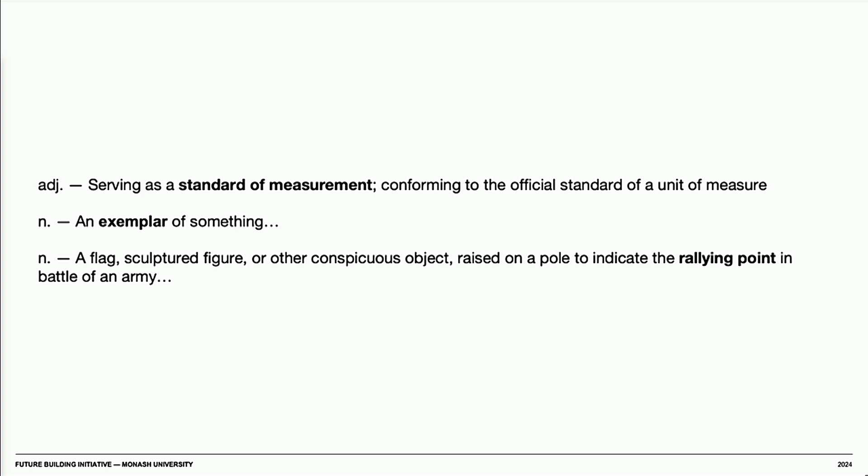More broadly, industrial standardization can be an enabler of innovation, and it can promote interoperability, compatibility, but in many ways that comes back to the people who activate the standards and the efforts towards standardization. I don't think we should miss that on the journey, rather than thinking of them necessarily as a technical tool.

There are, of course, challenges that others have touched on, but these are also enablers. I think we can often get fixated on the problem rather than seeing the opportunity. But these are global and local. As we've learned this week, many of the pressures here in California are replicated in various parts of Australia, and I think also when we've traveled to Europe, we've seen commonality.

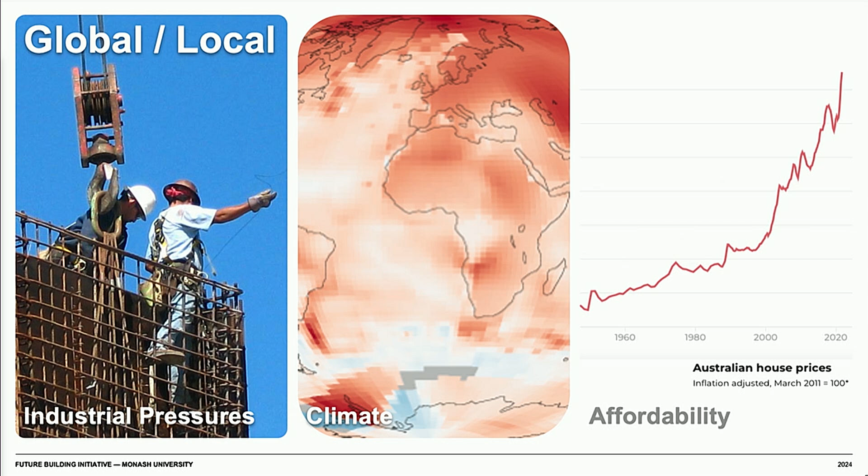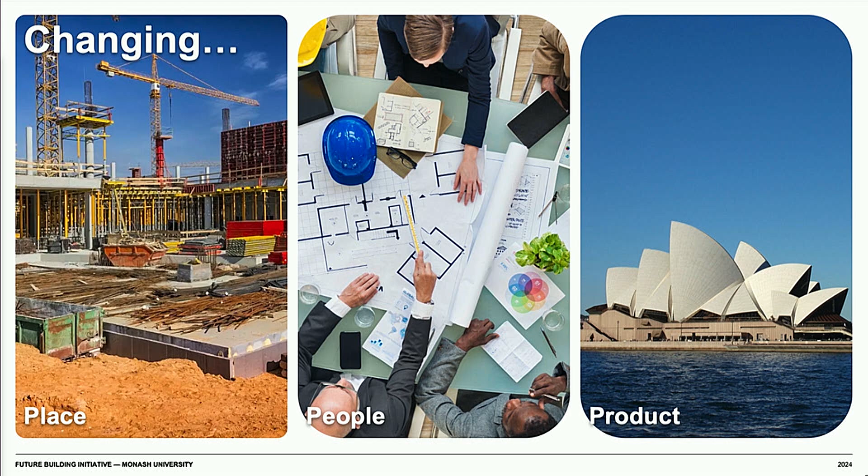Of course, there are issues that are specific to construction. Others have defined these - Koskela and Vrijhoef's three peculiarities to do with the site, stakeholders, and the product. And often we take a technical view of standards in the industry that really focus on coordinating the product, interfacing with site, but perhaps we miss the opportunity to work together in terms of coordinating people. Therefore, perhaps there's a softer view of standards that's required, and perhaps there's a role for design.

Of course, there's a history of designers in the built environment, and I'm not going to sugarcoat that. We are looking for a new way of working, socially, culturally, that is more productive. But I think when we look towards the future, there's a real opportunity to bridge the gap between research and market, and standards can play a role there, not just in terms of industry implementation. But of course, when we think about design in the built environment, there's a life cycle to contend with.

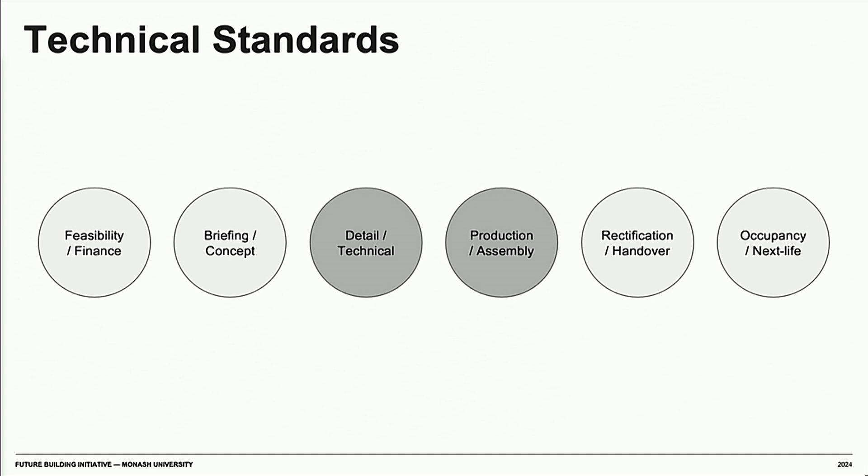Perhaps some of the technical view of standards really starts in the middle of the problem and looks to build out. If we can solve the interface of detailed design with assembly and production, then perhaps we've solved the problem.

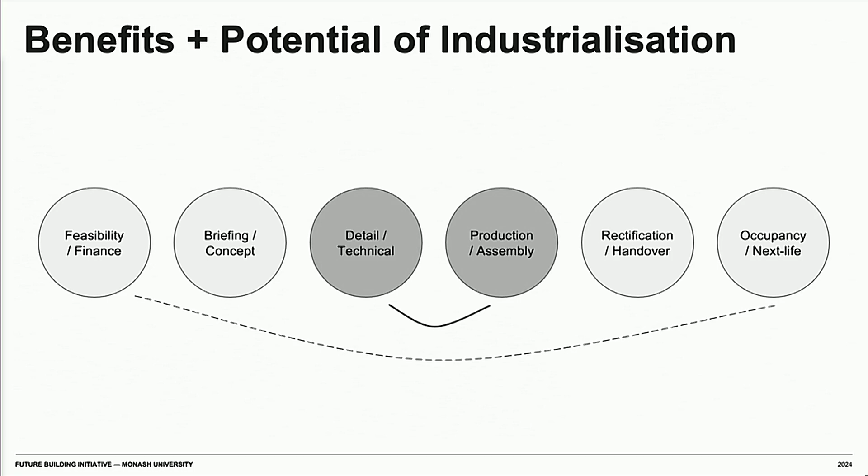But industrialization promises a new way of working, a broader way. And to my view, that really opens up many opportunities across this value chain, from early design ideation activities that contribute and help project feasibility, help projects get up, help them get financed, right the way through to occupancy and end of life, as others have touched on today.

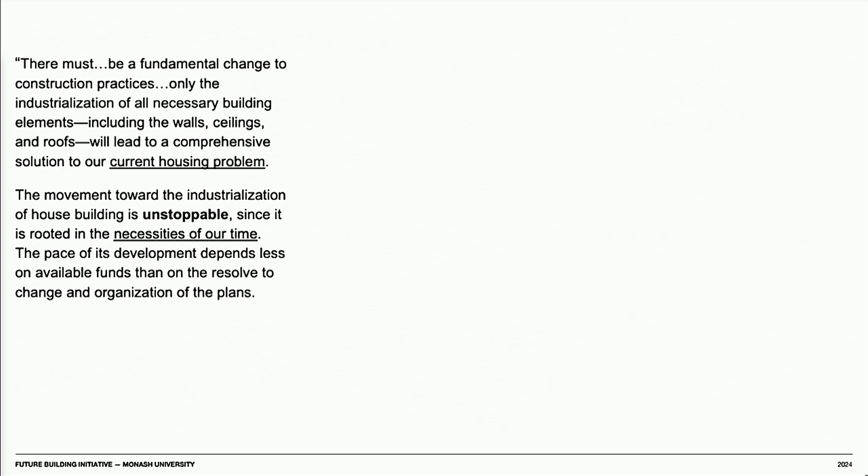But this certainly is not a new problem, and I dug out this quote. I'm sure others have presented this at various times. When we think about the housing problems today, we see industrialization as an unstoppable force, a necessity. But this is a quote from 98 years ago by architect Walter Gropius.

And so this really touches upon how architects have engaged with industrialization and change. As I said, it's a varied history. It is a long one.

If we go back to the late 19th century, there was a view that in the year 2000s, architects would be sitting on site, pushing buttons, seeing buildings get built.

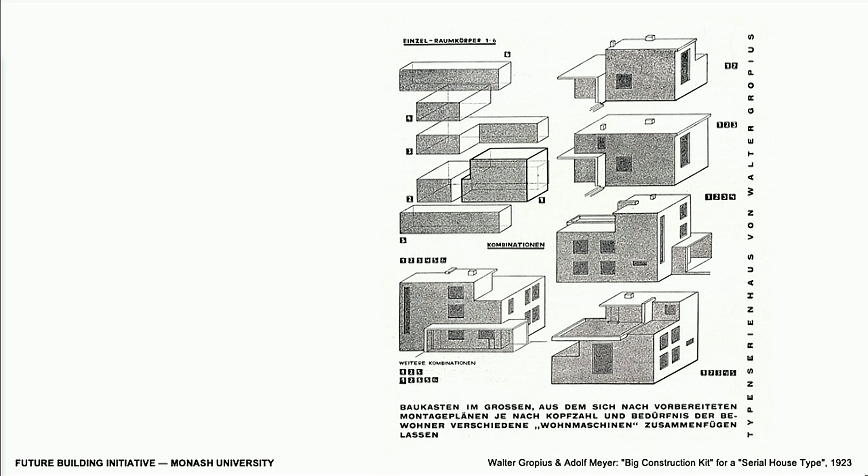And then during the 20th century, architects became interested in modes of production, mass manufacture, while others dug into the detail of building and looked at modular building systems down to the level of the concrete block, as Frank Lloyd Wright's Usonian homes did to a greater or lesser degree. And these modular building systems held a promise that perhaps there was a more efficient way of building.

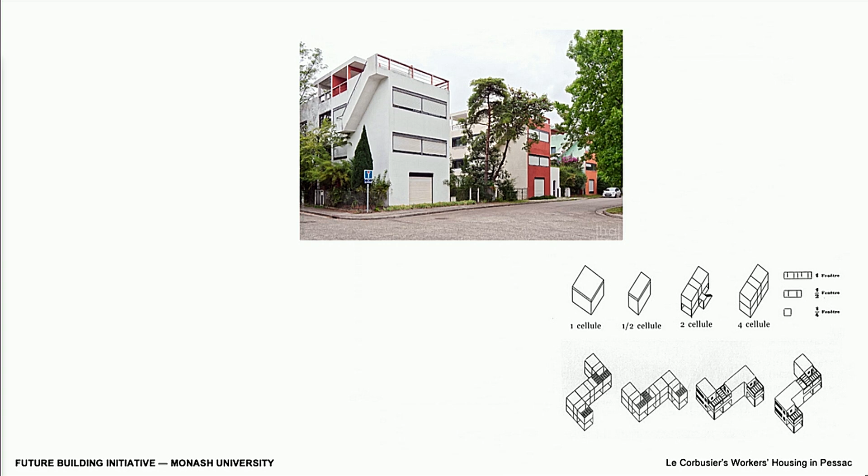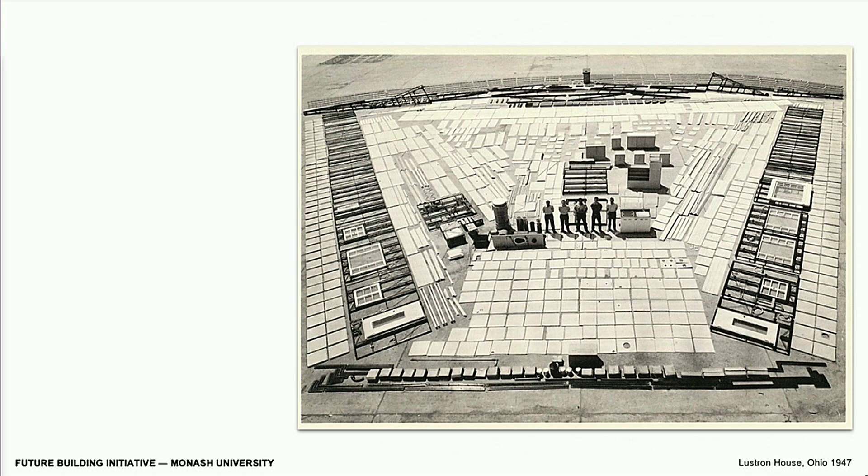And of course, there was a disruption of the Second World War, but that led to the creation of industrial infrastructure, and again, a promise of a new way of building that could leverage that investment, that infrastructure that had been put in place in response to the war effort.

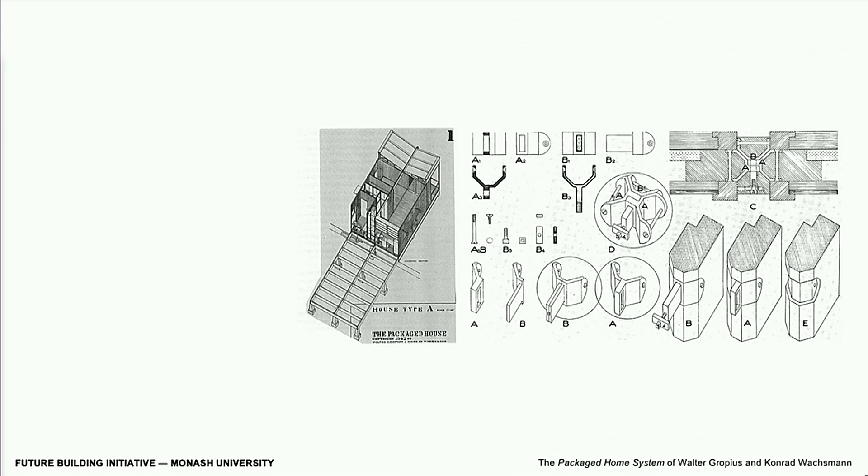But as we've seen, these initiatives obviously did not have the impact that were promised, but certainly created a number of ideas. Stopping at the midway point of the 20th century, I found this article from Fortune magazine, that reading it, you could replace the date from 1947 and put in 2024, and we might find ourselves saying exactly the same things.

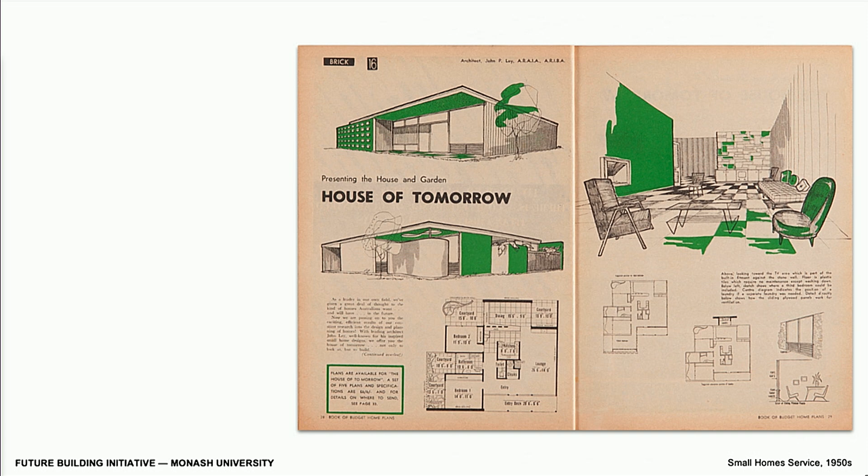We saw these homes as forms of suburban housing ideals, but that were effectively designed with an efficient intent, but also innovative ways of building and providing solutions for the greatest number of people for the least use of material, least use of labor.

But of course, as we moved through the 20th century, the number of industrialization efforts that were perhaps not quite as successful as were planned. And again, architects perhaps bore the brunt of many of the criticisms of these mass housing solutions, despite responding to a time of crisis of housing shortage, the need to rehome people after the Second World War.

And these are well documented and spoken by others as a failure of industrialization in many ways, and the legacy of that modernist period.

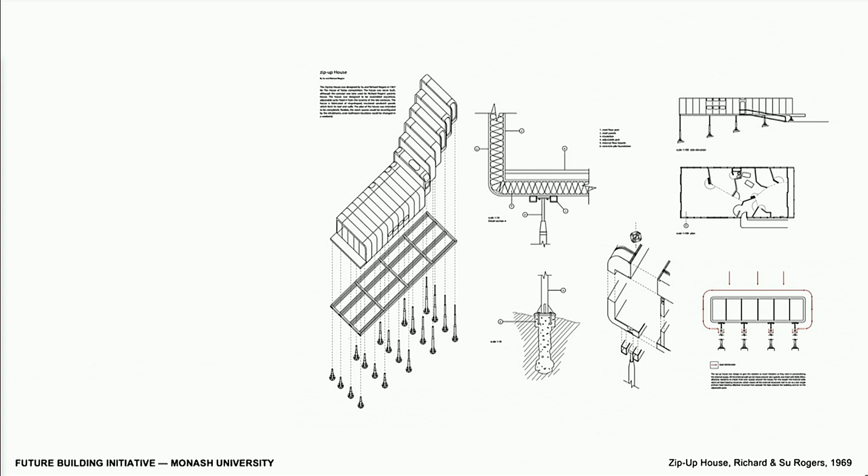And so later in the 20th century, architects drifted from that core intent of looking to industrialization as a means of delivering housing for many people, and really focused on the building systems, the logics, the ways of seeing design, or systems building as a tool of conceptual investigation rather than industrial implementation.

So really this is a story of a long pursuit of change, and it certainly doesn't stop in the 1990s, because since then there have been a number of reviews that tell us the same problem again and again, but perhaps architects have been less invested in these reviews, perhaps having been scared off by the mid-20th century failures.

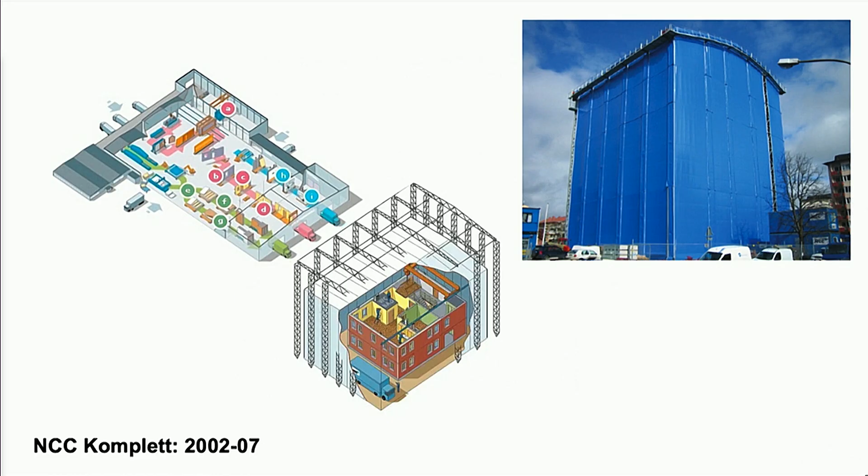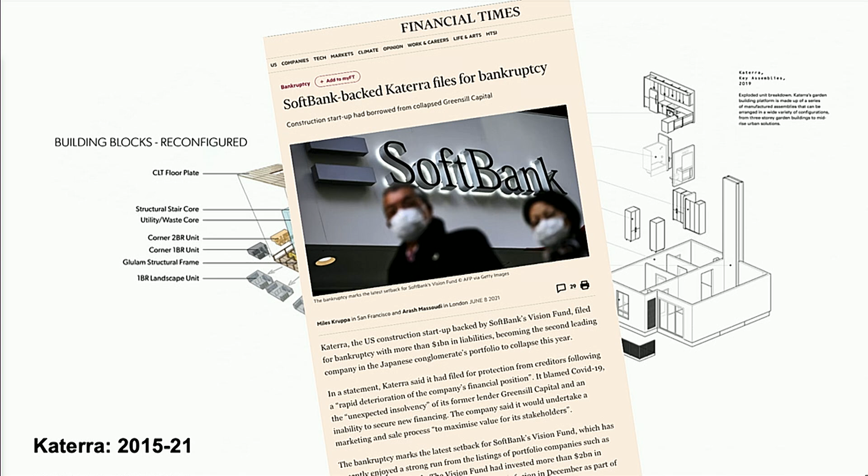Over the last 20 years, there have been a number of failures. Others have touched upon these, and I don't want to dwell on them and be a naysayer or a doom monger. But others have also asked questions about the perils of growth. And most recently, these failures in the UK have prompted the parliamentary inquiry into MMC.

We've done some work just looking at the last 5 years as a snapshot, and as a minimum, we calculated that there was between 3.6 and 4 billion US dollars written off in these failures. Of course, a substantial chunk of that is Katerra. However, it's not without regards to the number of other very similar efforts that have failed.

So looking for a pathway forwards, what do we see? What do we think that is and could be? Well, as a research group, we see that opportunity being design as a way to navigate the puzzle.

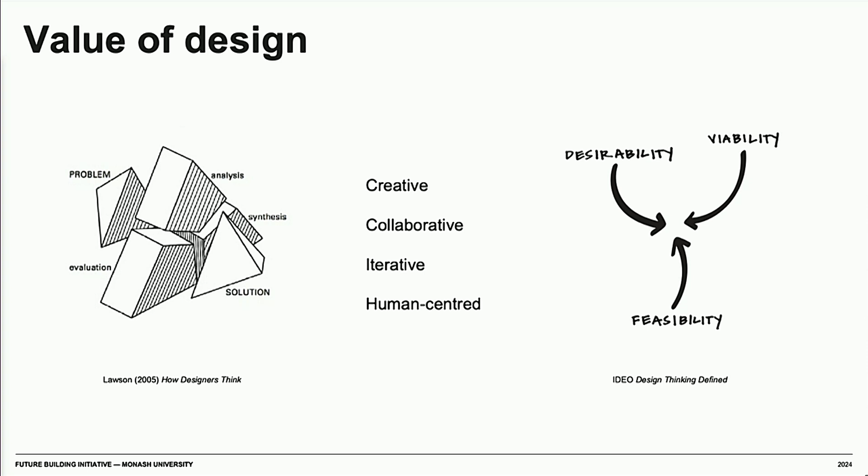There are a number of definitions of design out there. I'm not going to try and provide a concrete definition, but certainly there's a problem, there's a solution, there's analysis, evaluation, but also synthesis, and I really want to dwell on that. We're also looking for products which are desirable, viable, and feasible. But as a process, it's one that is creative, collaborative, iterative, but fundamentally human-centered, and I think we really must keep those aspects of process and outcome in mind as we work across the value chain.

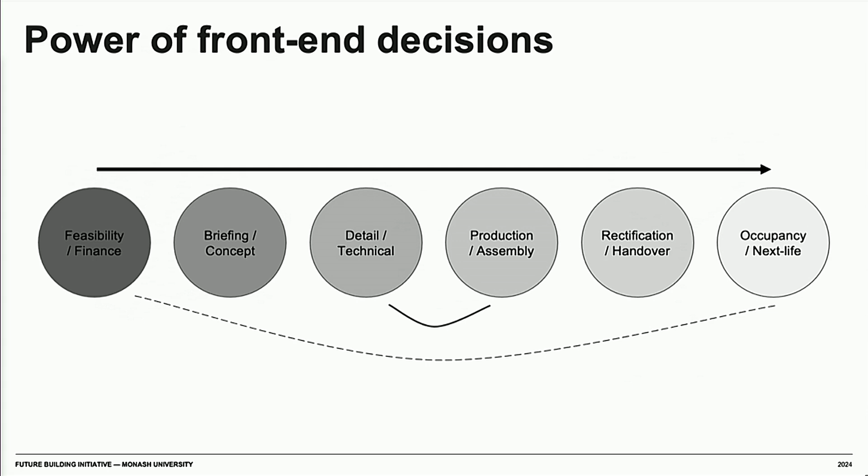That really helps us think about design and architecture as something that occurs beyond projects. This is something that I think architects perhaps have not been good at historically, because it also implies moving between domains with fluidity, letting go of ego, and looking for that collaborative process that leads to human-centered outcomes.

Of course, there are solutions. We've heard about product platforms and digital platforms as enablers of collaboration and enablers of good design outcomes. We also see technical tools emerging from manufacturing that perhaps aren't tuned to the built environment, and that are often positioning design as subjugated to the requirements of manufacturing and assembly.

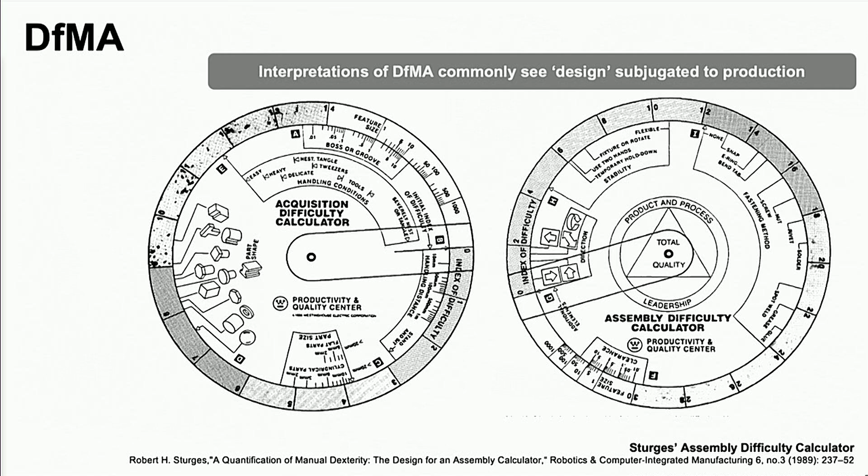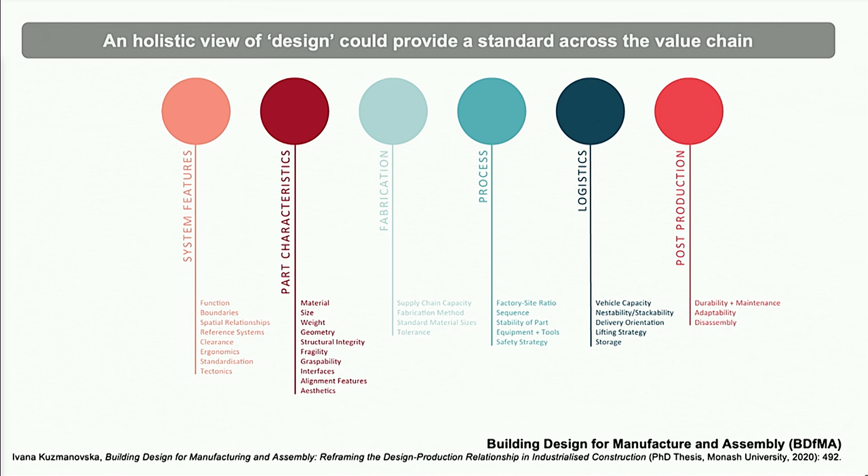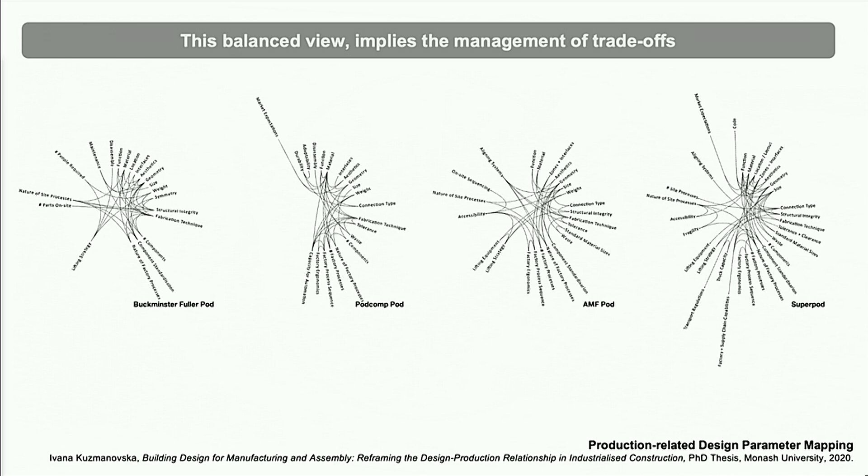We've done some work to look at what is required to take DFMA into the built environment, suggesting that a holistic view of design can provide a standard that works across the value chain. This holistic view implies the management of trade-offs, and I think that's an activity that the soft side of design is very good at doing. We can also use it as an analytical tool to look back at some of these problems of the past, review some of the progress we're making, and use it as a tool of analysis when we think about whether we're making progress towards improving productivity more generally.

So I'll close with a bit of a snapshot of the work that we've done in the Australian context. I do say this is just one approach, I'm not saying it's the approach. But our research runs through three streams. We look into products and processes, the parts of the building, the systems, and how we get them built.

We also look into the environment and resources that industrialization holds promise and can improve, and then the digital and computational design tools that are emerging and promise to improve the quality of design outcomes. So I'm going to step through a range of projects conducted within my research group, with a number of our industry collaborators, some of whom are here today.

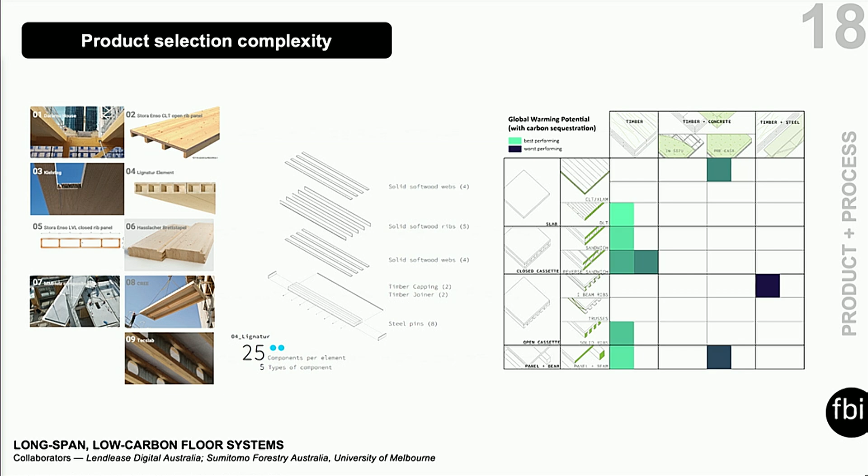We look at issues of product selection, looking for design support mechanisms to assess products in the market, and provide a lens by which we can juggle the multiple performance requirements when we think of fire, acoustic, structural, the production requirements in this project, looking into long-span, low-carbon flooring systems, such that we can make better decisions as designers much earlier in the piece.

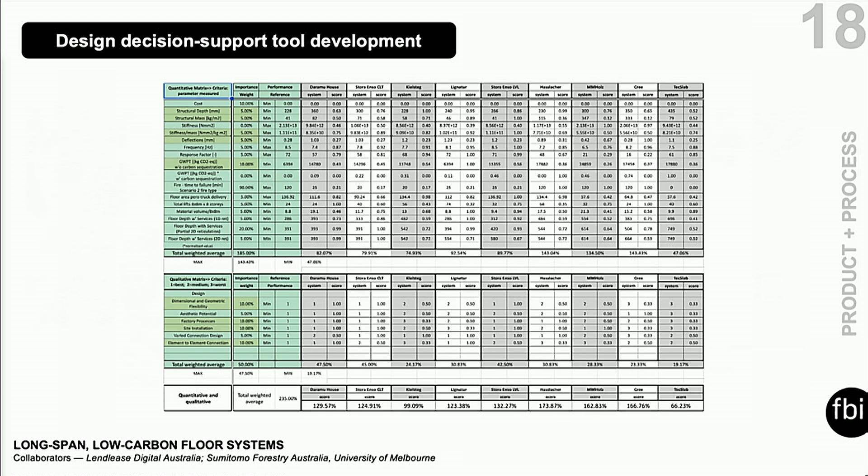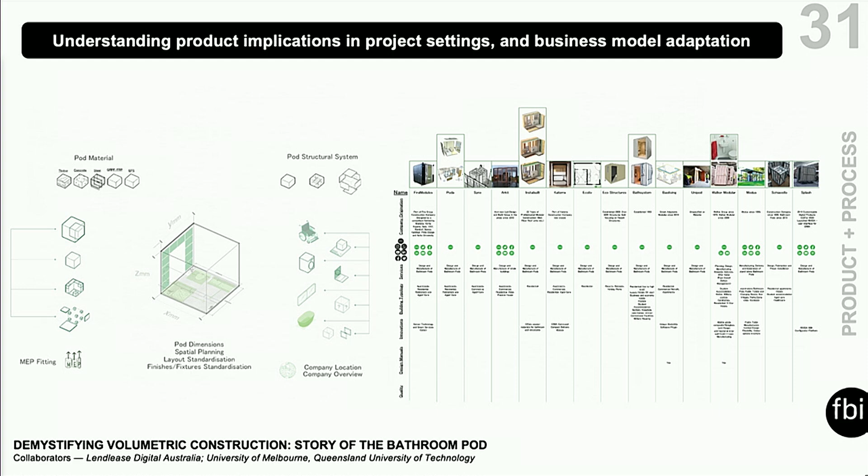And this provides a bit of a framework, a fairly simplistic framework that we would like to take forward and develop. Again, like others have spoken about today, we looked into modular production systems in this product and process stream, trying to unpack and demystify volumetric construction, looking at bathroom pods and also the business model adaptations required of companies manufacturing these.

We've looked into projects within the Australian context, the information flows, design information flows that are required in order to implement DFMA modes of working, and also implementing more lean processes in order to strip out procedural waste when we're implementing projects.

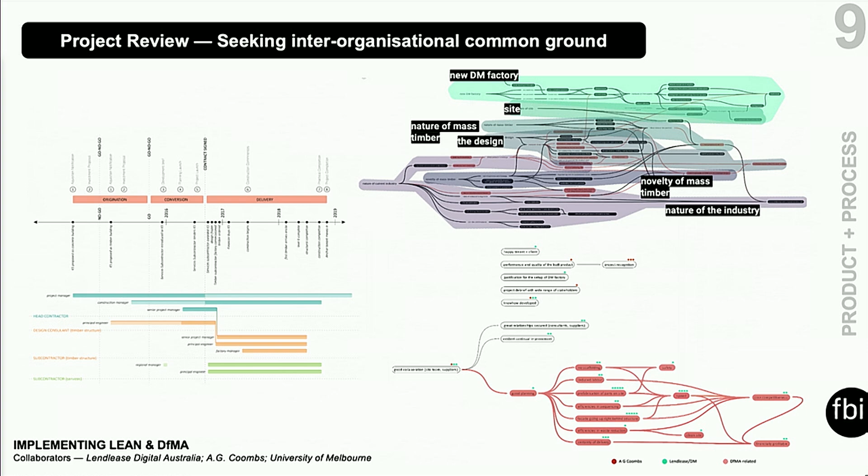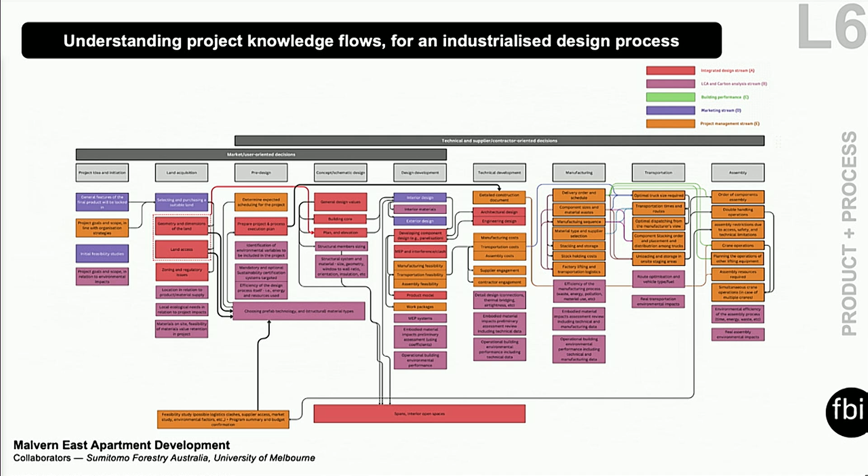But we've also worked with partners to try and create a strategic framework, a decision-making framework that can help guide design decision-making across the value chain, in order to industrialize project decision-making capability from start to finish. And then we've also worked to benchmark material waste.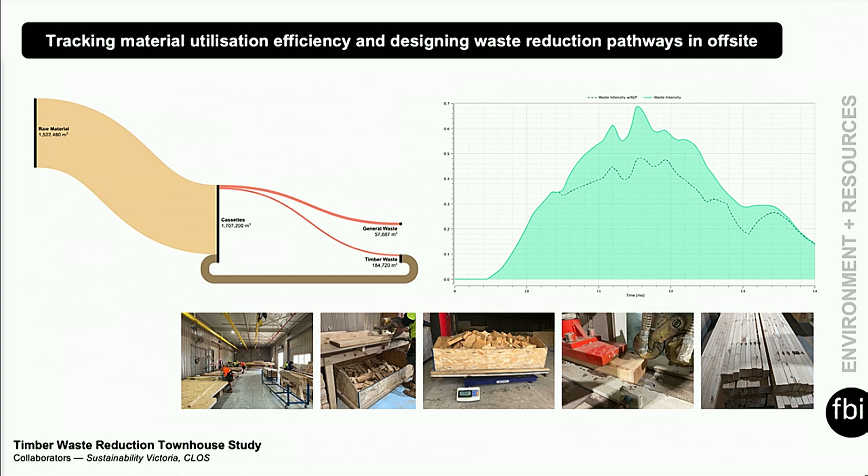So we do see industrialization holding great promise here. This project, working with an off-site construction company, demonstrated through the analysis of 40 townhouses that off-site production reduced material intensiveness by 18% and created a 40% waste reduction.

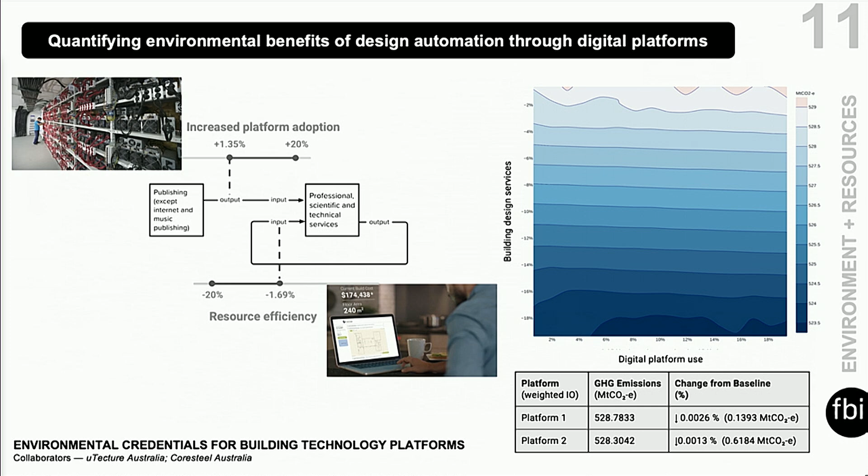And then as we push towards implementing digital platforms, there is an increase in power consumption, but also a decrease in design intensiveness. So we've worked with a partner considering their two platforms to free up human capital through design automation, which offsets in many ways the computational increase of carbon. Overall, this project demonstrated there was about 1,700 trips to the moon potentially removed from the CO2 chain.

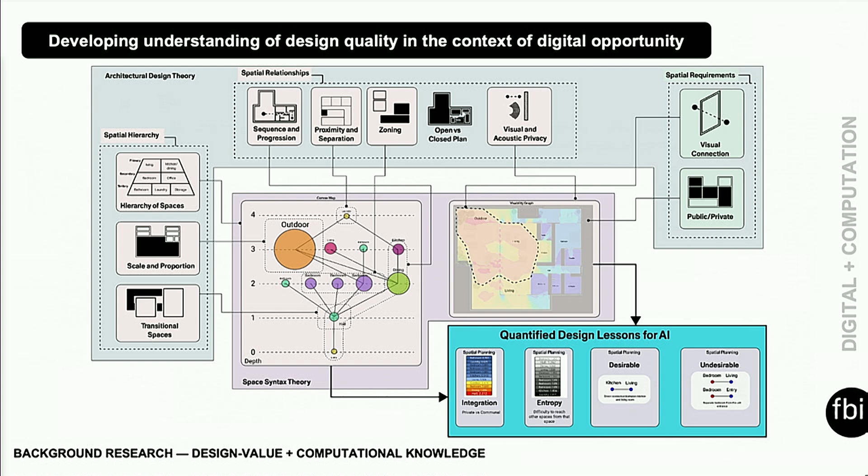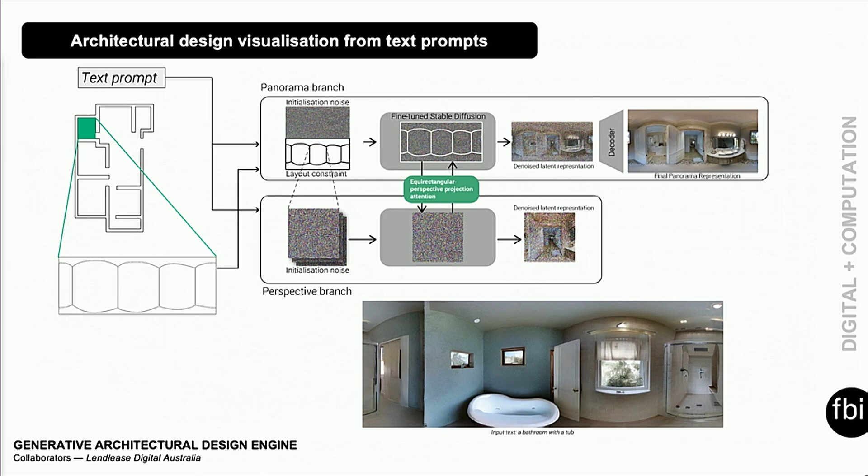And then finally, looking into our digital and computation stream, we look to understand and define what design quality is in the context of design digitalization. So looking into design systems, measures of quality, in this case in multi-residential building, such that we're able to benchmark and understand the design criteria, encode that, to then create artificial intelligence and machine learning design tools that leverage language prompts to automatically create renderings. We see this holding great promise moving into later phase design actions.

So I want to leave with a positive vision of what the standard of design or architecture is and could be. I think that we, as a community of designers working across all sectors of the value chain, should be using design to develop new processes, new approaches founded in a systems basis and that are market focused. Because if we don't build anything at the end of the day, we can't measure success.

I think we need to equip professional domains, those in the room today, but also out in the wider industry, with knowledge and the capability to change. Part of that is also about empowering the supply chain, I think that's a critical piece we often overlook. Yes, there's really exciting companies, really exciting research occurring, but construction is a wide industry, a huge employer, a massive part of any country's GDP.

And the change that we're looking to implement is urgent at the end of the day, when we think about the problem of carbon affordability and housing responsiveness. So I will finish there. Thank you.